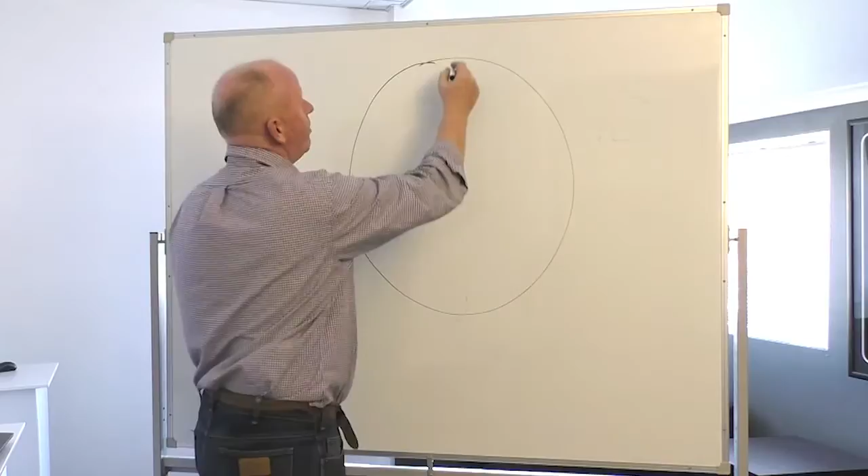Today I would like to talk about inspections. What we're going to do is we're actually going to just have a bit of a talk about it, then I'm just going to stick one of these inspections inside MEX itself. Firstly, in a previous talk that I've given, we talked about the maintenance pie being this. And basically we said, hey, all maintenance can be broken into three main areas.

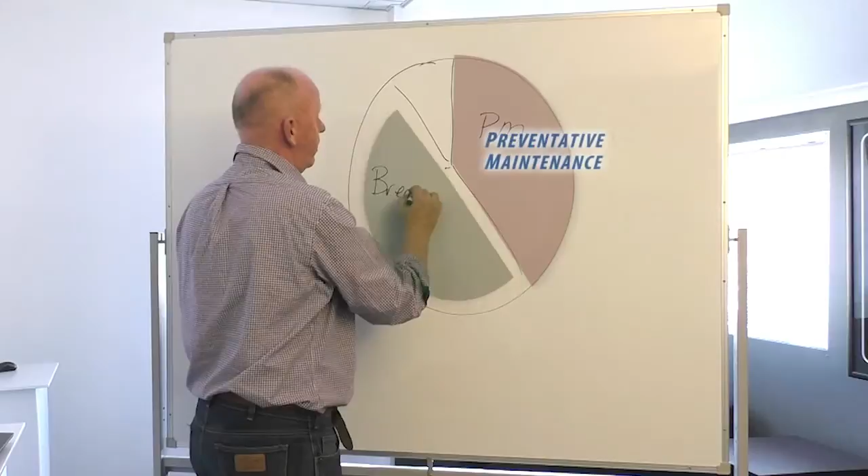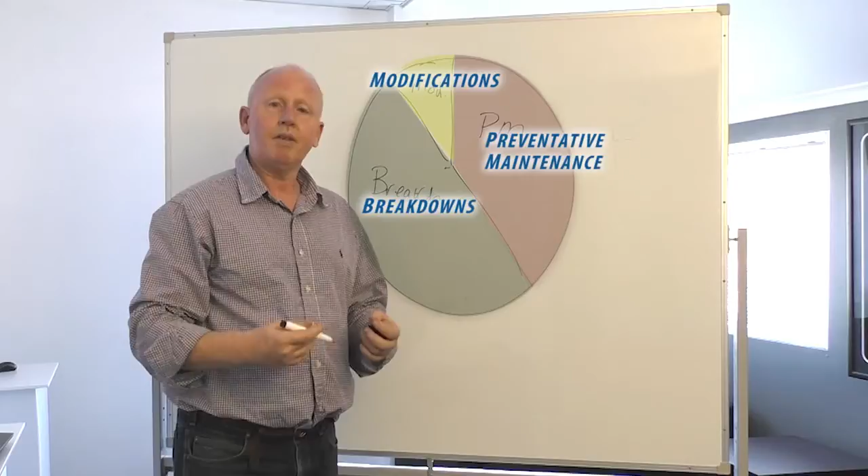And we'll just say there's the PM side of things, there's breakdown, or corrective maintenance, whatever you want to call it. And the last category is modification. Now, I had quite a bit of a talk about what was the best form of maintenance that you could actually do within your company. And what we came down to is, we said, hey, PM was the best part. That's what we should be doing.

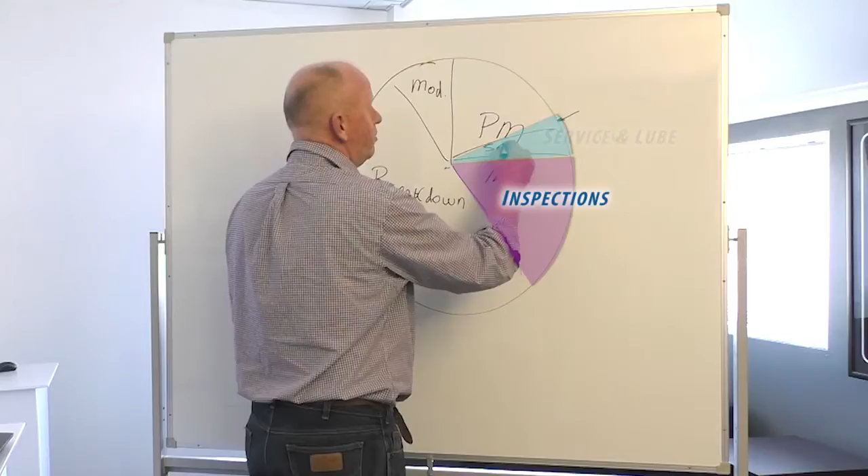And then we delved into that and we broke PM into three categories. It was inspection, service and lube, and repair, replace. Now, just as a recap, inspections is going out and observing what's going on with your equipment, with your plant, with your vehicles, with whatever. Having a look and seeing what sort of condition it's in.

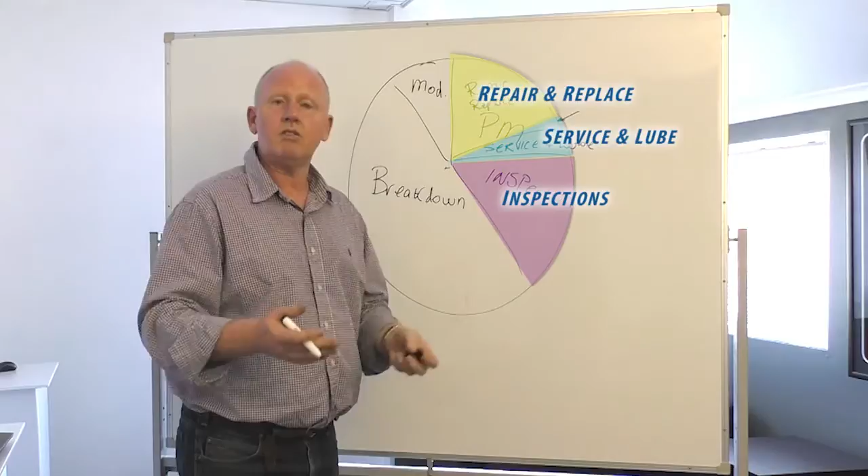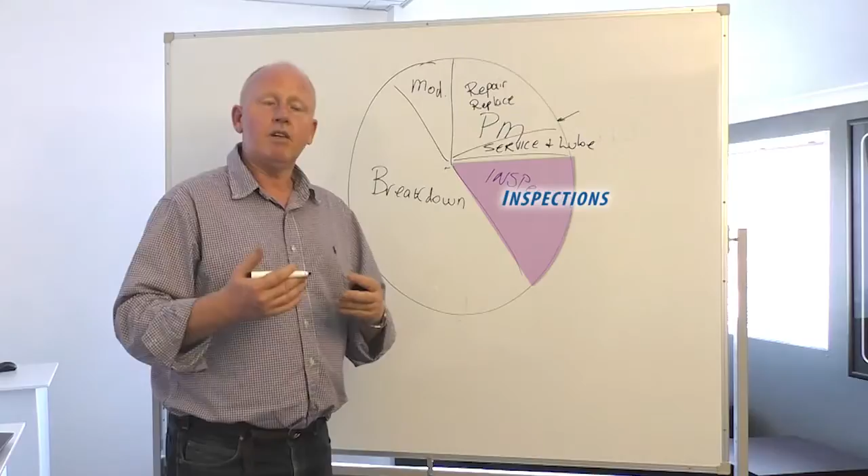Service and lube, it's the basics, oils, fuels, lubricants, that sort of stuff, filters that need to be replaced. And the last one here is repair and replace, which is a time-based form of maintenance, which just says, every 2 years we do this, every 3 months we do this. And we spoke about how to make it really efficient. How can you minimize the loss within your operation? And what we came down to is inspection. So let's get practical about that.

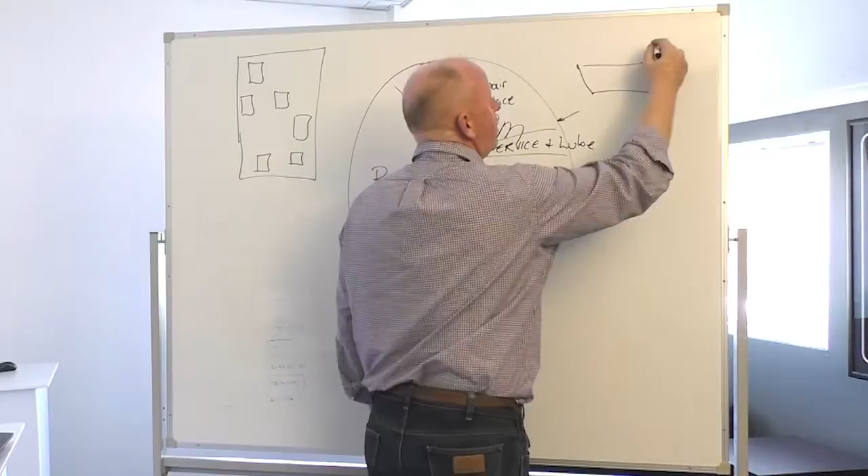What is inspection? If I was to have some sort of operation, and it's not very difficult to imagine it, basically I have lots of equipment in here that needs to be inspected on a daily basis or a weekly basis or a monthly basis. Or it could be some big unit over here, where we've got trucks, loaders, drag lines, dozers, you name it. Some sort of mobile equipment, or it could even be a car.

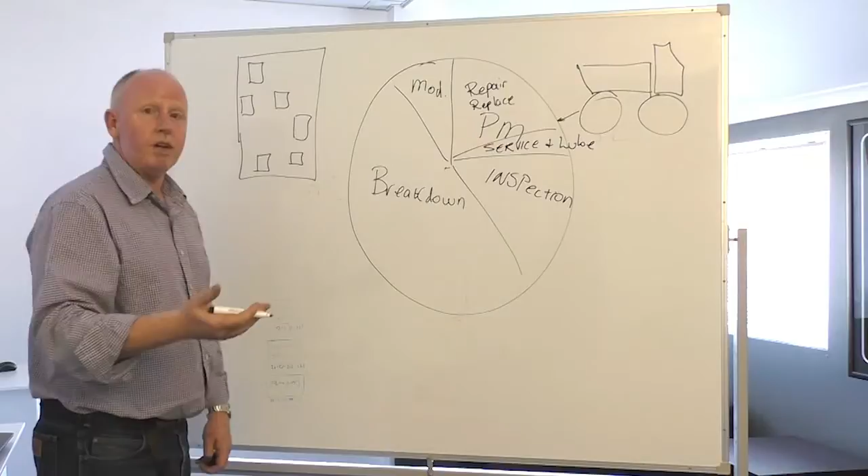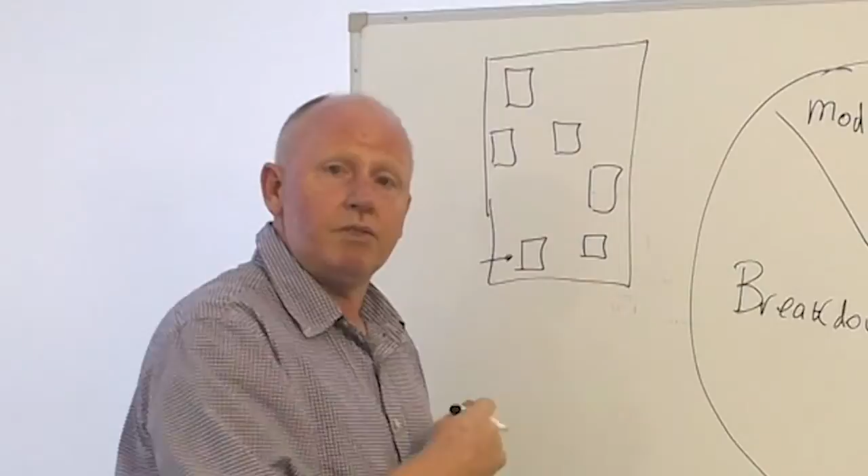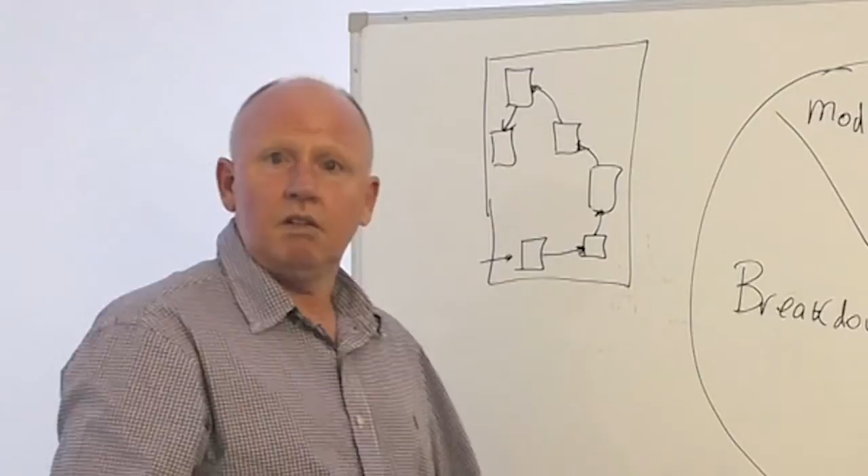What an inspection is basically saying, okay, pick a frequency. It might be daily, might be weekly, might be every 3 days, might be a month. Where I'm actually going to go into an operation, into an area, and check each bit of gear. We'll go to this piece of equipment first, then here, and so on, to make our process of inspection efficient. And at each item, we're going to have a number of things we might have to do.

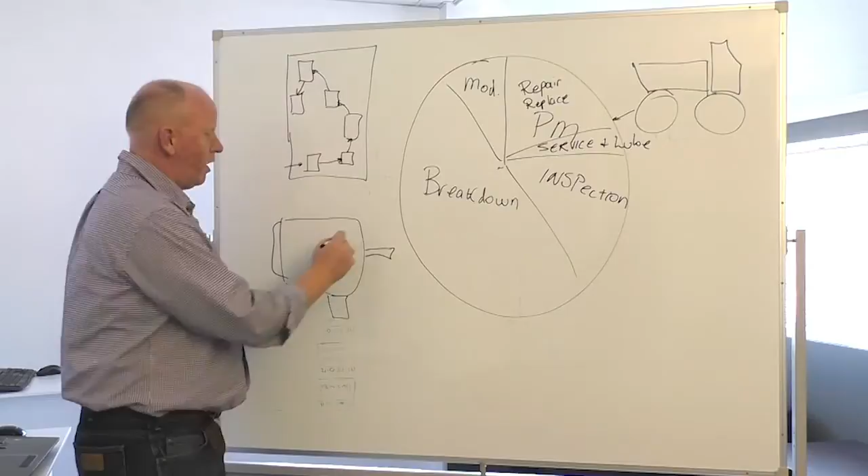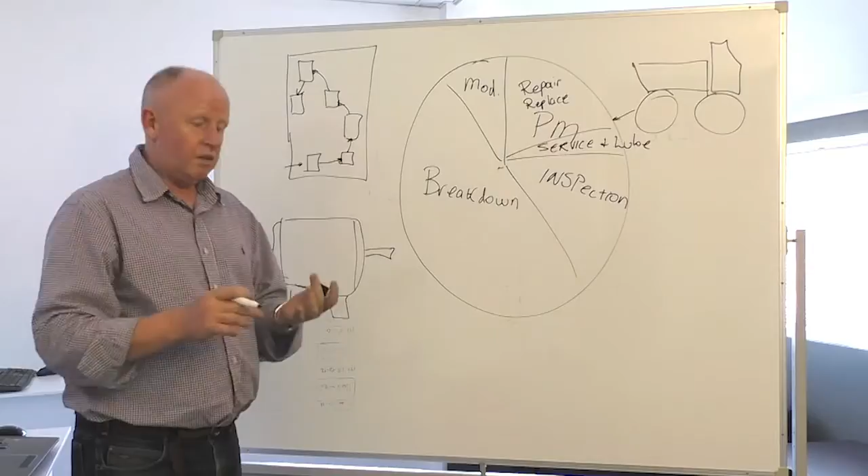For example, if we just take an electric motor, what could I do on a regular basis? What could I do as part of the inspection on that, if it's out in the elements, or if it's stuck in a back corner somewhere? What we spoke about with inspections was also the best part was doing the simple stuff. So, electric motor, what can we do? Things such as, make sure it's clean, so it's ventilated, therefore it can cool itself.

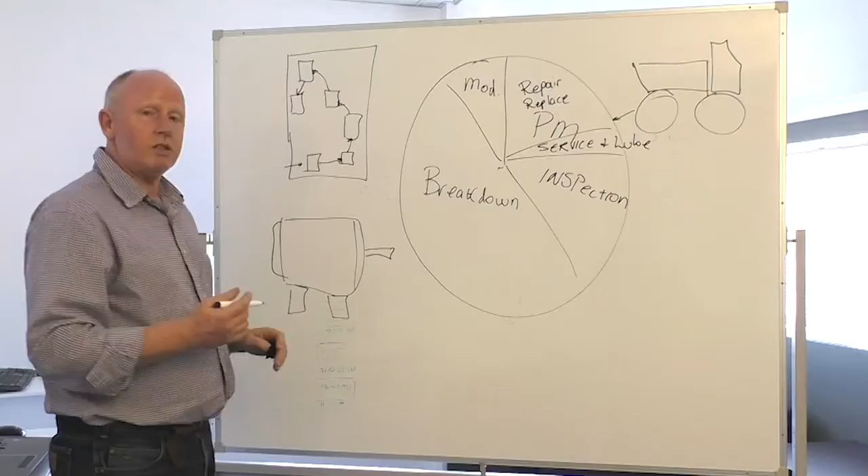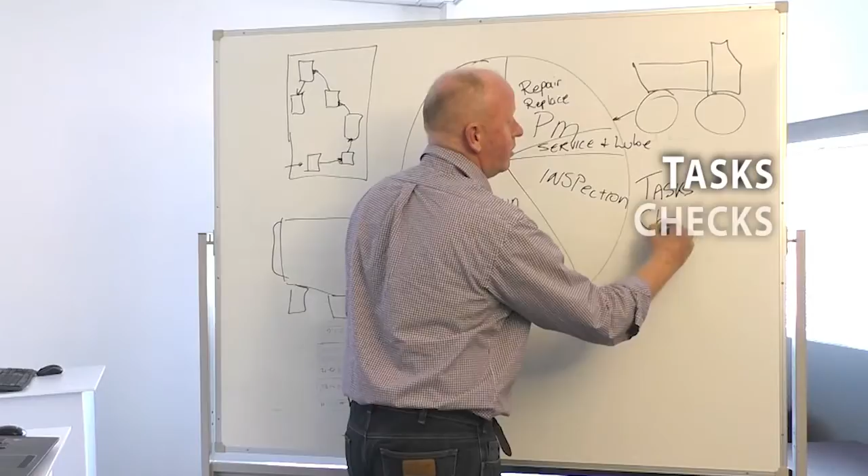Stick your hand on either end to see if it's running hot. Stick your hand in the middle. What else could you do with a motor? We could get more technical, but I'm going to keep it nice and simple here. Now, when we do an inspection, there's three main things that you can do. I'll break it down into, firstly, there's tasks, and then there's checks, and then there's readings.

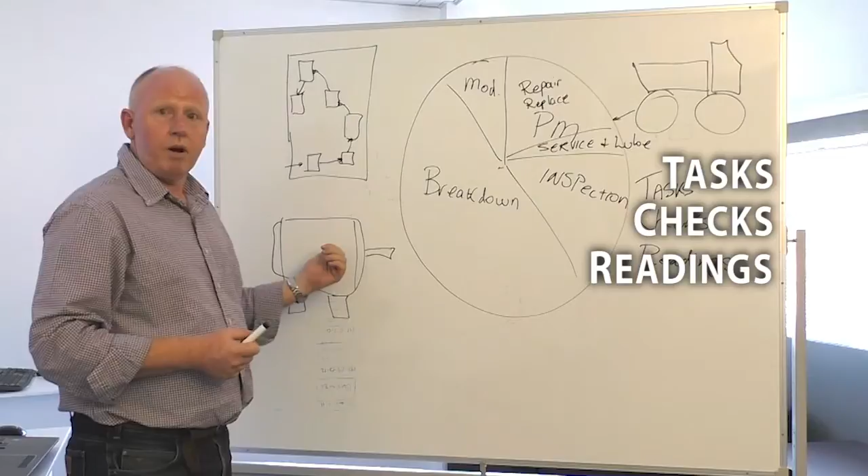Again, I've broken this whole thing down. Now, what is a task? It's basically just doing something. Make sure you clean down the motor. Brush it over the top to make sure all the dirt is off it. A check might be, hey, is this running? Is this noisy? What sort of noise is being generated by the motor?

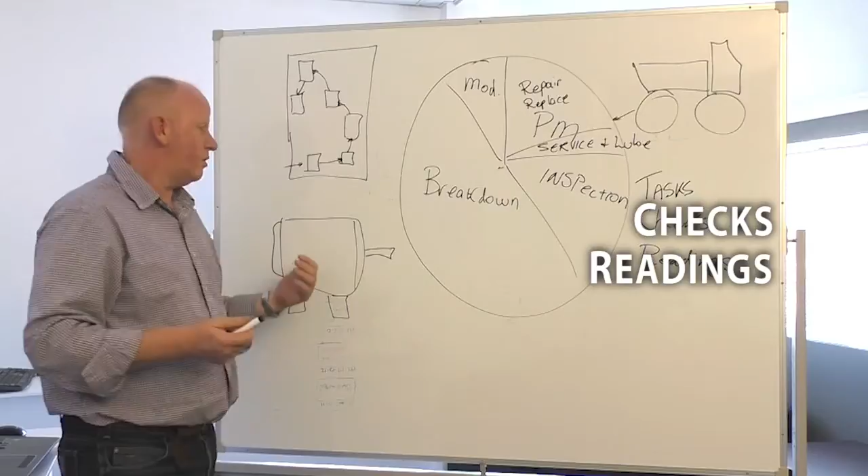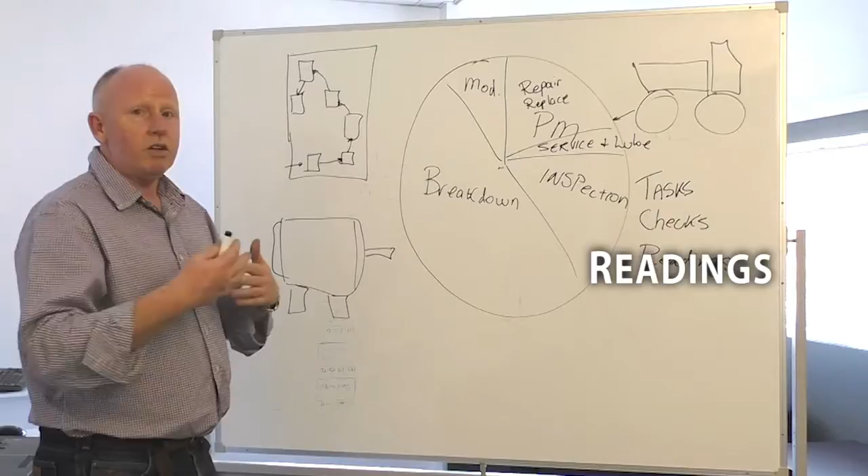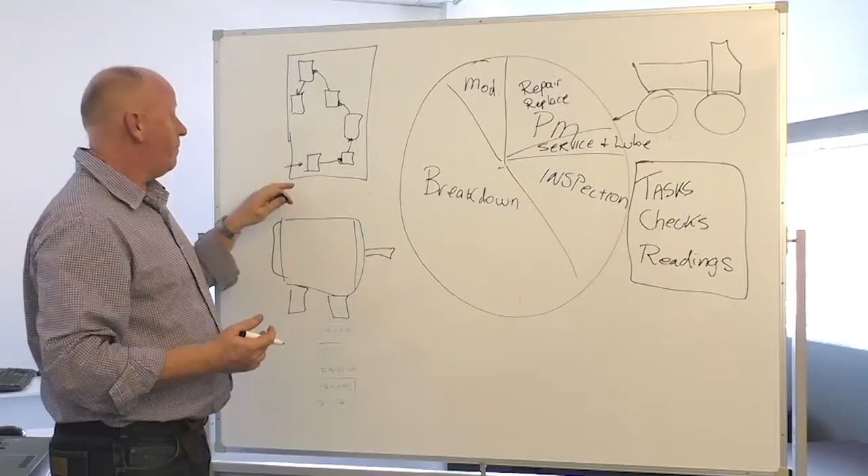And a reading might be like, okay, what's the temperature reading of that end bearing? What's the vibration level? Some sort of reading. And what we want to be able to do is encapsulate those inside that inspection. So you imagine then, as we go to each piece of equipment, there's a variety of these three items to be done. Now, that's it.

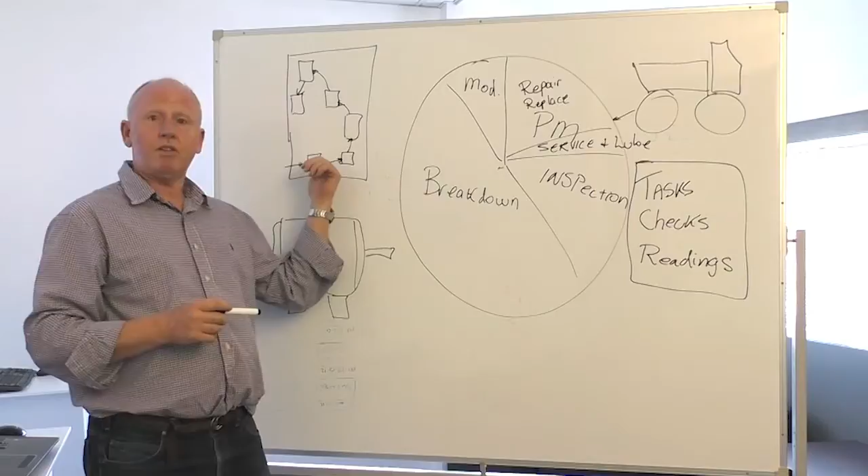Pretty straightforward. Now what I'd like to do is actually just hop into MEX, and I'll show you how we can actually set up an inspection for this plant. I'm going to do just a quick look at this, and we're just going to look at this electric motor. So let's jump into it.

Where I'll start is actually on the main menu of MEX. I'll go into the preventative maintenance part of the system, and the first thing is I'm just going to add in a new inspection. So I press that button. And the description of it will be a weekly plant walk around inspection.

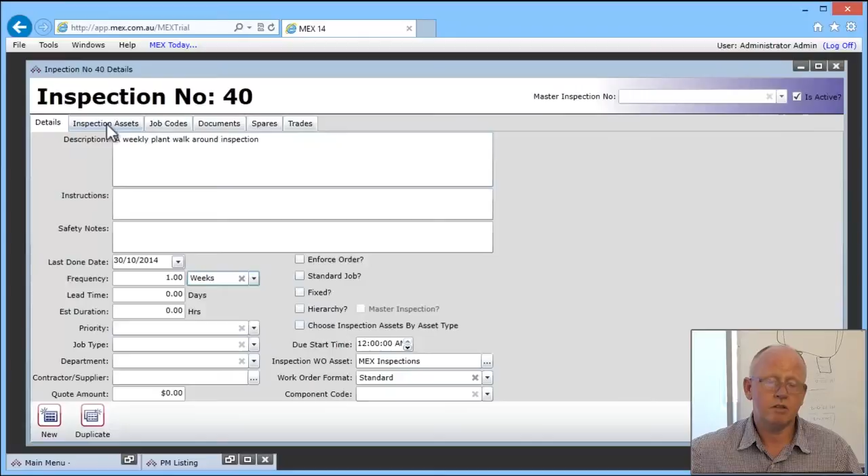The frequency is once a week, and I don't think I'll stick anything else in there. I'm happy with it. Yep, I'm happy with that. So I go across to the inspection assets. And from the inspection assets, what I'm going to say here is what are the items of equipment that we're going to be inspecting in this routine.

Now, I'll just press the new button and then select the asset. As I said, in this case, I'm just keeping it simple. I'm going to go to production, factory 2, and under, I think it's production 2, there's an electric motor underneath that conveyor. And I'll select that as being the first item in the inspection. Now, what I can actually do on this screen as well is put my assets, or the equipment, in order, as to how I want it inspected.

Then I just select the question set. Now, it's the first time I've done this. A question set does not exist for this electric motor. So I've clicked on the ellipsis button, and I'm going to add in a new question set called Elec Motor Weekly. And the description is weekly electric motor inspection. And I could put an asset type there as well, but I won't worry about that.

Now, I'm going to add in a new question. The first question will be clean down the top of motor. Question type, in this case, it's a task. So we say it's a task. And do I want to record it? No, I won't worry about that. And I've got to give it an answer, so therefore the person can say whether it's done or not. So I'd say answer is yes, or the answer is no.

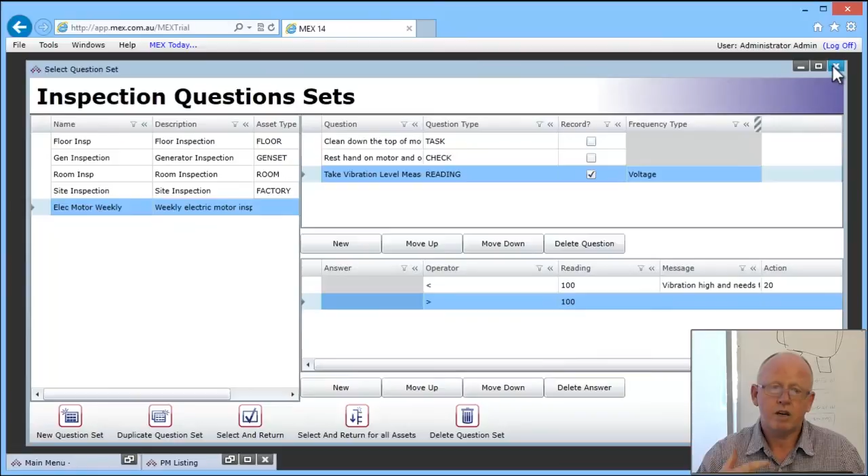Now, I know this seems like it's taken time, but I've now done a weekly check for electric motors that can be used across all motors. I will actually talk more about this in another edition to show you how, if you've got fire extinguishers to check, you can have one question set, one asset type rather than asset number, to cover the inspection of all fire extinguishers.

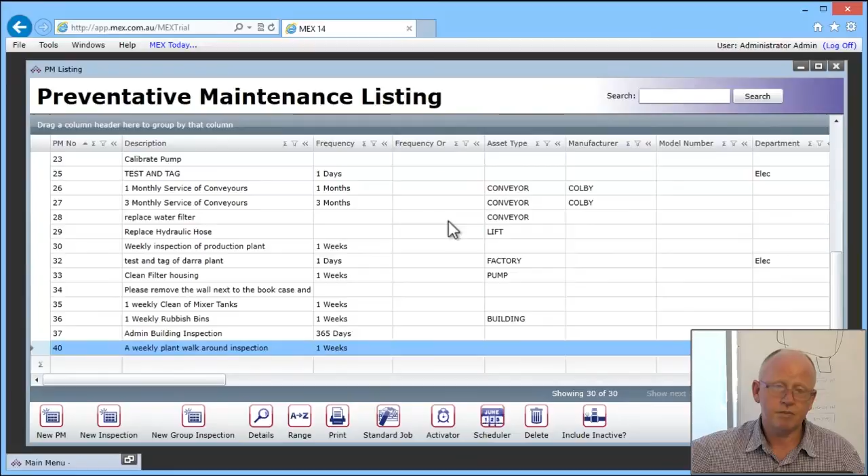Now, that's the first asset we've added in. I've gone back to the inspection itself and added another new item in. I just press the new button and I could select another asset from that area and slowly build up my inspection so that it's available for use. I won't go through that whole process now. Once that's done, I can close that inspection off, and the activator inside MEX itself will now turn that into a work order whenever it's required to be done.

Thanks a lot. I hope that was good and it gave you a bit of an idea as to how inspections can work in MEX. Thanks.

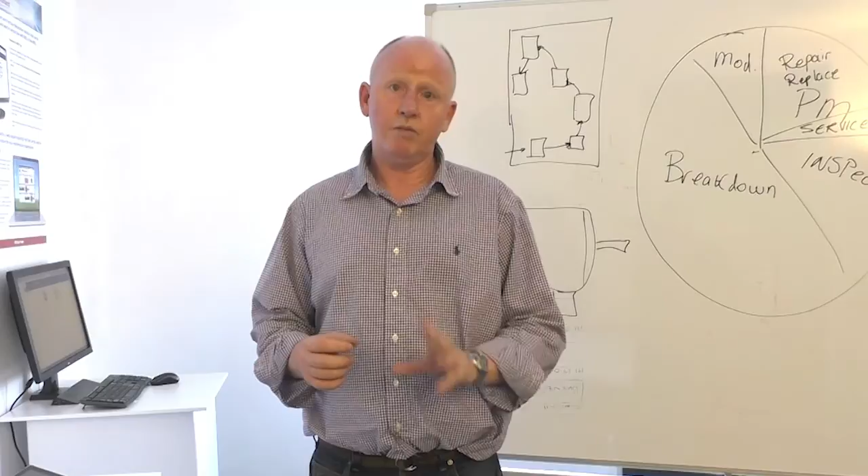That was just a quick look at how to put an inspection inside MEX. Additional to that, the activator, when it runs inside MEX, will create work orders from those inspections, which you can then just hand out to people to be done. Not only that, it can actually be used on the iPad, the iPhone, and even on the Windows Surface.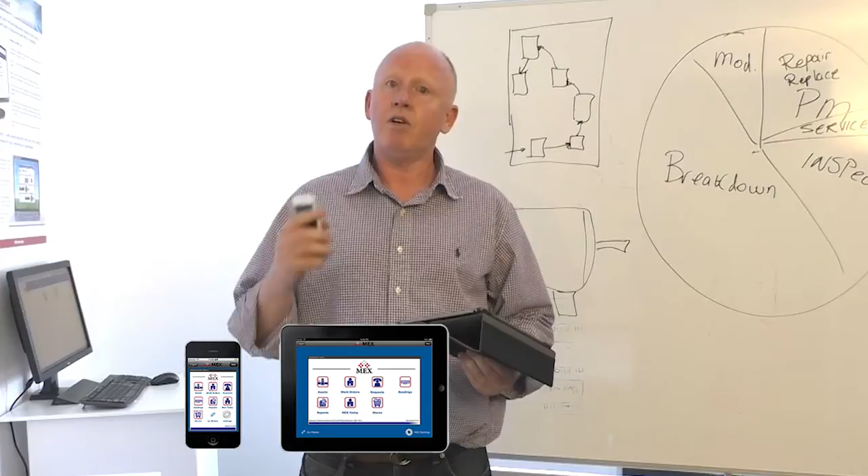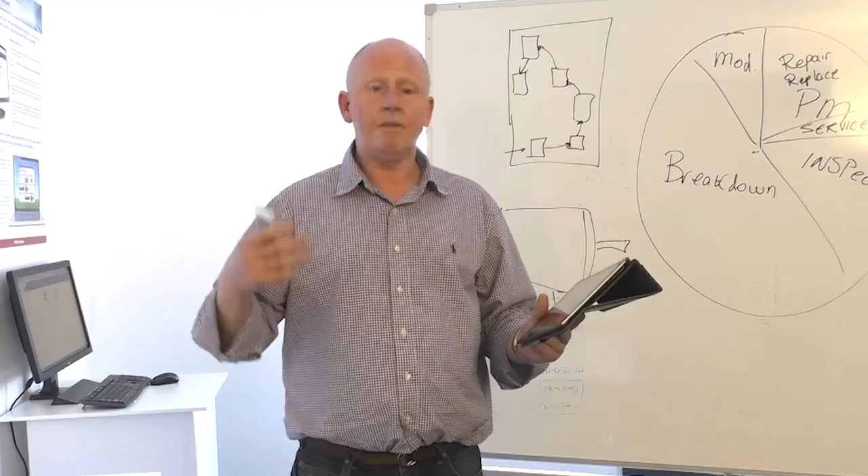We have an inspection system which is running on these. So if you have guys that are mobile, then literally you are doing paperless inspections. The values that are being recorded will immediately be going straight into MEX as long as it's online. And so you've got the whole world of inspections covered.